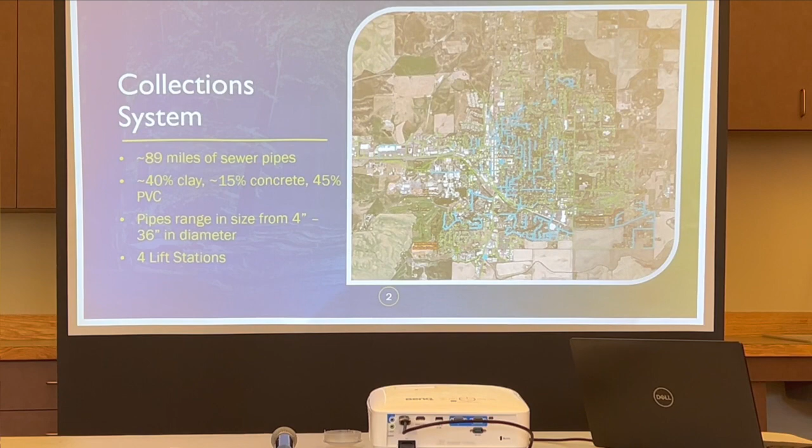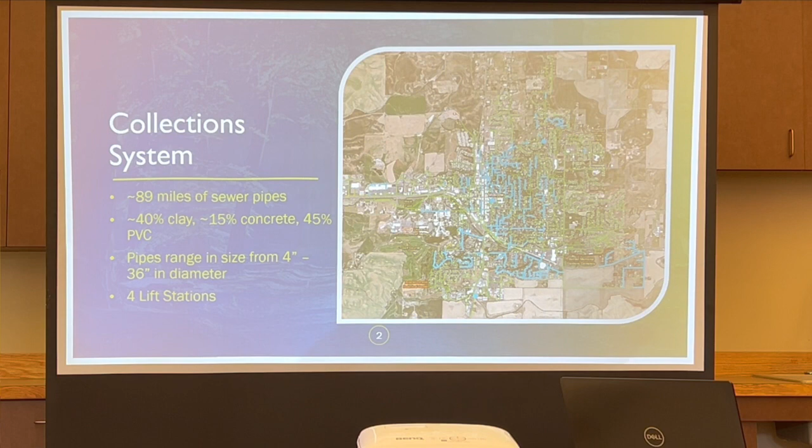Before it gets to the actual facility, we have a collection system that everybody's well aware of. We have sewer pipes under the ground, about 89 miles of sewer pipe that we own and maintain. If it's going to a property or a building, the sewer pipe that leaves the sewer main is owned by the property owner. We have roughly 40 miles or so of that. We have 89 miles of pipe. 40% of the system is clay, and that's relatively in the heart of the community.

Evan, could you use the microphone? Oh, yeah, absolutely. Please. Thank you. I didn't even test that, so testing. Yeah. Testing. That's great. Thank you.

So roughly 40% of the sewer system in the city is clay, and that is more so in the heart of the community. We actually have a physical contract from 1890 of some of the first installation of the clay system, which is really neat. As it expands outwards, you get some of the concrete sewer pipes, and since the 70s we've been installing PVC, polyvinyl chloride pipes, the plastic, which have roughly a 100-year lifespan. But the clay that we have has held up really well in portions of the system.

We have a variety of sizes, anywhere from 4-inch up to 36-inch, and those 36-inch pipes start creeping more in this direction as they approach our reclamation facility, which is right here. We also have 4 lift stations. Generally, when they think about a city and how to get sewage to dispose in a direction, they're thinking of the lowest point, so they follow the creek line and set it there as it leaves your city.

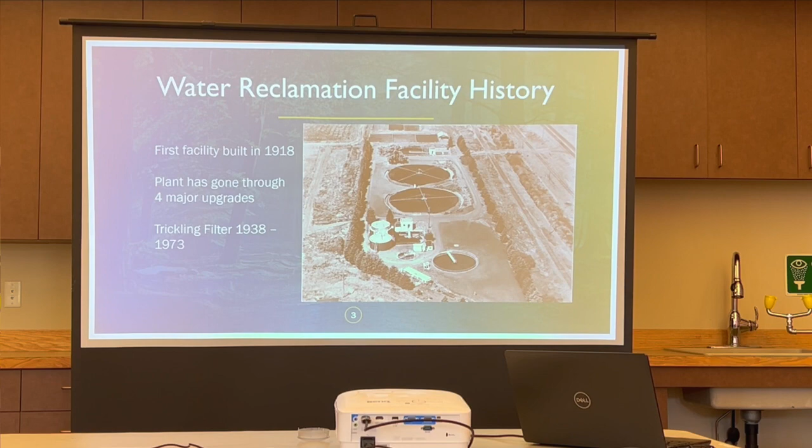So some history on the facility. The first facility was built in 1918. It didn't consist of much. It was some septic beds, septic tanks, and some drying beds. And we also have that original specification document from 1918, which is really neat. And those were kind of located in this region.

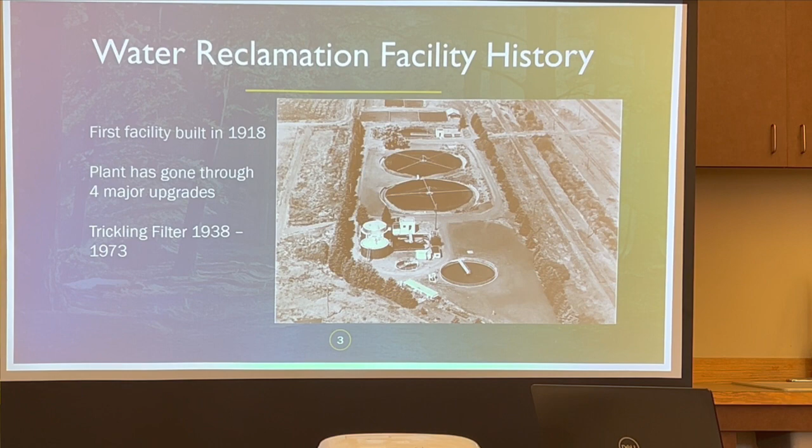In this photo, you can't see those septic beds, but the facility since then has gone through 4 major upgrades. 1938 was probably the most significant, the first real significant upgrade, which was these trickling filters. They're about 100 feet in diameter, and they consisted of a porous media, typically just stone, a rock, and it would allow that wastewater to go over these distributors and then filter out on top of this media and go through.

And the media grows what's called a zoogleal mass, which essentially helps remove the nutrients from the wastewater. They're not highly effective, but there are still trickling filters to this day throughout America. And actually, Coeur d'Alene has 2 of them, and that's what they use to remove their nutrients. But it's on a plastic media rather than a rock.

This photo was taken roughly in the late 50s. I don't know the exact year. We still have this tank. This is our primary clarifier, and this tank is out at our current reclamation facility. But from 38 to 73, there was a variety of upgrades: the digestion system, the contact chamber system, and the clarifier in 1956. It went through a lot of upgrades, but not until the late 70s did things start advancing pretty rapidly due to the Clean Water Act.

So once the Clean Water Act hit, the EPA had to start looking at what do we really need to prevent from hitting our waterways. The research on things takes quite a while to do. They look at river bodies, they look at small streams, they do what's called a TMDL, a total maximum daily load, on these bodies of water to see what would be impacted by a certain nutrient level or a potential contaminant.

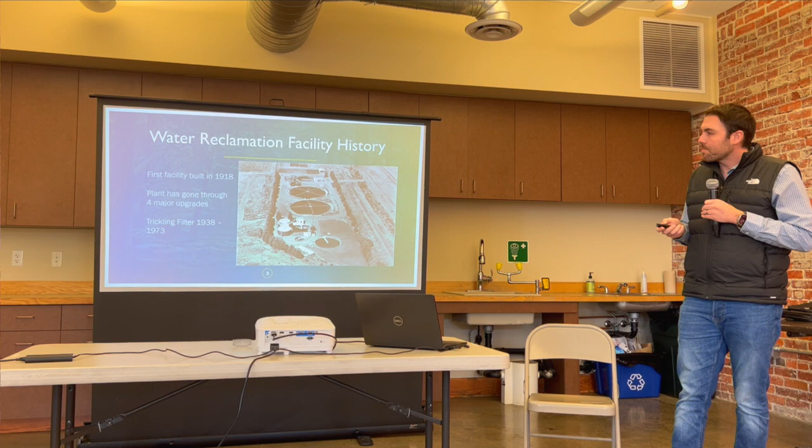As they keep researching things, there's exotic contaminants. It's almost never ending what they're able to find in the water. So the more they learn, the more advanced these treatment processes have to get. It's an ever evolving process for us to keep up with infrastructure upgrades. The next phase after 73, there was really nothing until 1996, where we upgraded a dewatering process and a chlorination system. We put in a building. I'll dive into the dewatering process a little later, but you're taking the built up sludge that, yeah.

Evan, I just have a quick question. Would you rather people ask questions while you're talking, or do you want to wait until the end? I'm fine making it a conversation if people want to ask during this. I leave time for questions, so I'm fine with that.

Okay, thank you, sir. So the dewatering process was introduced, and the chlorination system, that's a chlorine gas system that we'll jump into. And then in 1998, we put on a new headworks building, which these are old auger monsters. The headworks is the first initial defense of the treatment system.

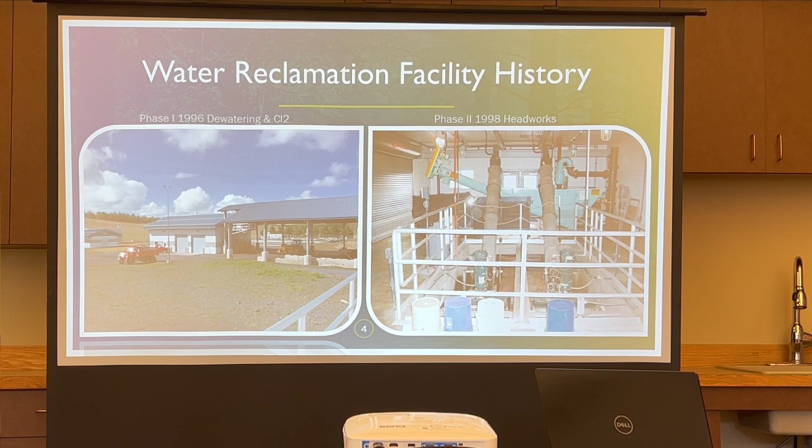During this time frame, in 1997, the EPA started going over what our permit would look like, and so they started doing their TMDL, studying the creek, what would be impacted if we didn't remove X contaminant in the water. And so in 1999, after we completed this, they issued us a permit, and that is still our permit today. It was issued in '99.

It expired in 2004, and it's been administratively extended since 2004. And so the EPA issued these permits. I don't want to bore you with all of these numbers, but there is a really important parameter that we do look at, which is total phosphorus.

It's one of those nutrients that causes, it's the most rapid producer of eutrophication, just excessive growth in a body of water. So aquatic life gets impacted because you have plants trying to grow, because it acts as a fertilizer in a body of water. And so you reduce the dissolved oxygen concentration in whatever that receiving body of water is, and then it impacts freshwater biota. So that's a really important one.

It is the trickiest nutrient for us to remove. It takes a lot of internal manipulation of our process to help and make sure that we achieve the parameter that they've given us, which is 0.136 milligrams per liter. That doesn't mean a whole lot to most people, but it's a really small amount of this contaminant that we're able to have leave the facility on a daily basis.

And so just to give you a general overview, this is east, and so we got north going this direction. The water flow path is coming through this headworks area, making its way down here, hitting these pumps, flowing through this process, and then going this direction, and ultimately out to Paradise Creek. So as we start walking through this briefly, that's kind of the flow path that we will be taking.

To give you guys some general treatment figures, we see on average somewhere around 700 million gallons of water come into the facility. So that's somewhere around 2 million gallons on an average day that we have go through. What we do experience from time to time, the collection system, all the sewer pipes out in the city, aren't necessarily sealed tight. And so the older stuff that we do have, especially when they laid it in the early 1900s, they allow it to weep.

We didn't have a mechanical means of cleaning the sewer pipe, and so they didn't really have gasketed joints on everything. These sewer pipes are just 3-foot joints going down a sewer line, and they allowed it to weep to be able to self-clean. We didn't really have a mechanism of getting in a 6-inch pipe and cleaning it really well. So when the ground gets super saturated, especially during the shoulder seasons, we will see increased spikes of flow come in.

That's not necessarily because we're attached to the stormwater system. We do have separate systems, but we will see an increase in the ground saturation, and then that will come into the facility. From a daily perspective, it's very rare to happen, but we do have events where we see surges in the water. That's incredibly common across the country.

Is that in the older parts of the city where the, what do you call them, the sewer things would come off and the water would be spraying out? Well, yeah, I know the downtown area, the stormwater system has trouble handling that, and so we do see a manhole just surging with water coming out of it. That's primarily the stormwater system.

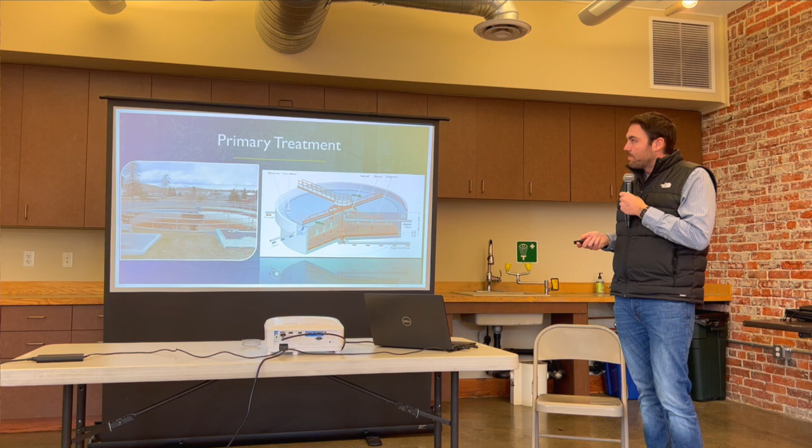The next step is influent pumping. These are 3 Archimedes screw pumps. They create our hydraulic grade of the facility, which is just the highest point. From there, we drop about 12.5 feet from this point down to the exit of the facility, so that everything can be gravity-fed from that point on and not pumped throughout different processes. Each one of these can pump 6 million gallons. We only had to do that once, during 2019. All 3 of them were pumping.

And this is the first place in which we measure the flow coming in. What happened in 2019? It was a flooding event in April. Yeah, I think it was April 6th or 7th. It was a massive flooding event. Maybe some houses got touched with the water.

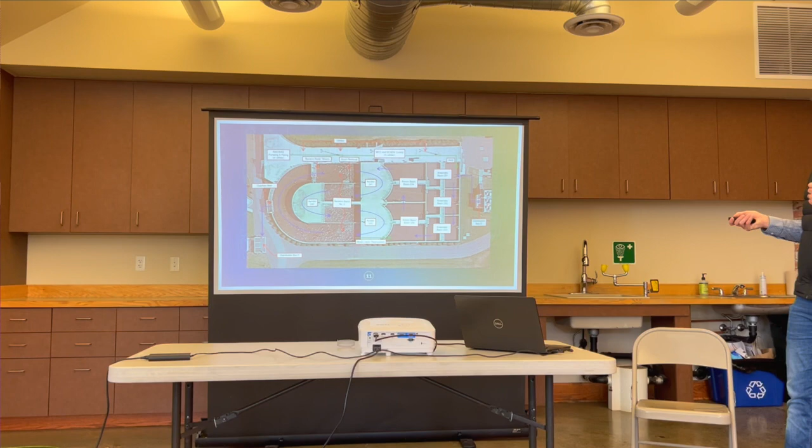So the next step, after our pumping station here at the hydraulic grade line, it comes into here, and this is quite complicated. If you go out in person, you're just looking at water, but there's a fascinating process happening, and I don't want to waterboard you to death with it. But I will go into the very basics of it.

One of the really neat parts about this is we actually complete the nitrogen cycle via these microorganisms, and so you have urea coming in the form of the ammonium ion. And it walks its way through, and this is an anaerobic basin, which means without oxygen. We have microorganisms that we starve of oxygen and food in a clarification process downstream, and we bring them back to the start to the incoming wastewater. At this point, that incoming wastewater has only gone through a screening process and nothing else, so it is a readily accessible fuel source for these microorganisms.

So what they do is they've been starved for about 6 to 8 hours, and they'll make their way into here and start feeding on the incoming waste, and they use it as a fuel source. So they have already picked up nutrients throughout the process. We're reusing them. So they keep the phosphorus molecule on them as a fuel source for storage. They will eventually abandon it if they get too stressed. And so that phosphorus molecule is detectable by doing laboratory analysis when we run tests on it.

But what they'll do is they'll come into it with it on them. And right now we'll have really 5 milligrams of phosphorus in here. As they keep consuming waste, they'll say, I don't need this fuel reserve anymore, so I'm going to abandon it, and they will start releasing it into this one. And like I said, we want to get rid of phosphorus, but what they're doing is they're abandoning it and putting it back into the water. So it starts spiking our phosphorus concentration as it moves through these processes. These are all 3 the same type of tank. It allows detention time and allows them time to consume fuel, and then they ultimately release the phosphorus.

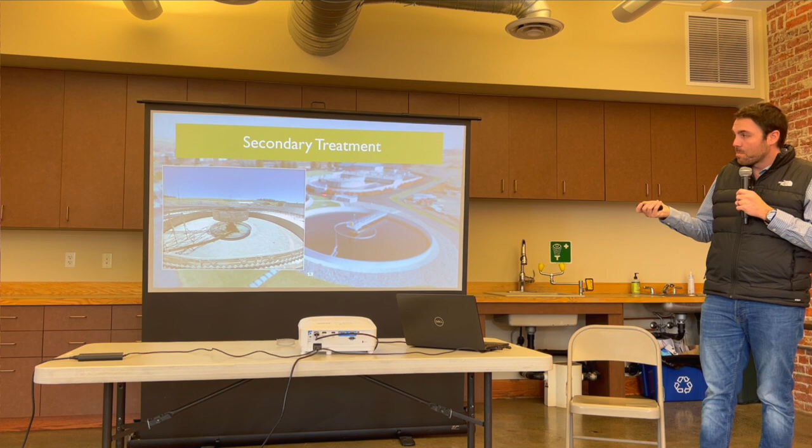From that basin, we have that brown liquid, those microorganisms. We have them leave and come to this clarification process. Again, it's just a quiet area, just like our primary clarifier, yet these are about 1 million gallons in capacity. They're 100 feet in diameter. They allow the microorganisms to settle out.

If those mixers on this basin were to turn off, they would settle out rapidly, instantaneously. They start settling and compacting down at the bottom. They do that in these clarifiers. So they settle out to the bottom, they end up getting pumped down here and returned. So these are the ones that were starving. They get returned back to the start of the process to help us consume the waste.

And then throughout the day, a portion of them start to get removed to holding tanks to then become the solids. So we turn them into solids at that point. So they will stay in here for hours. It depends on flow. It's really based off of hydraulics. They'll stay in here, they have no oxygen, very low oxygen, and no new food source. So they're very eager to start the process over again. And then a component of them get removed and wasted out, and that is how we maintain our population, our poundage of population in the system, through these tanks.

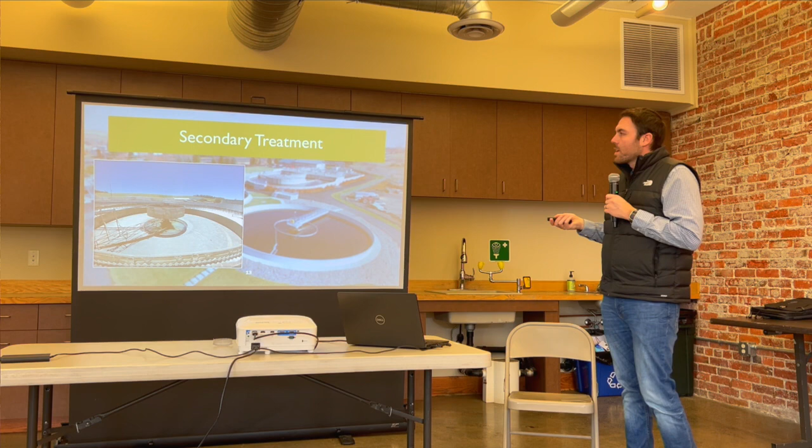Following that, in 2010, when we completed another upgrade, it was about a $10 million upgrade, we did a tertiary filtration system. This is a continuous upflow system. I didn't take a picture of it just because it literally looks like we're looking at nothing. But the CAD drawing of it breaks it down a lot better. It introduces the water from the very bottom level of these media filters. It's just a very coarse sand, and we introduce aluminum sulfate, and it binds to the colloidal solid, the phosphorus molecule in the water, and then it starts getting attached to the sand.

The sand gets continuously backwashed, and then we remove that dirty water and pump it back to the start of the system to introduce the dirty water back to the start of the wastewater treatment process. And so these do the bulk of the additional refinement of phosphorus removal for us. That was their entire intent, to keep phosphorus low and what's called nephelometric turbidity units, which is just the clarity of the water. It removes large solids, any particulate in water.

So legally, they only need to run from May 15th to October 15th, depending on how the week falls. So they're only running for half the year, and that's when the growing season is. So that's when we need to legally remove the phosphorus and keep these online. So they are not yet online for this year, but we'll get them up and running soon.

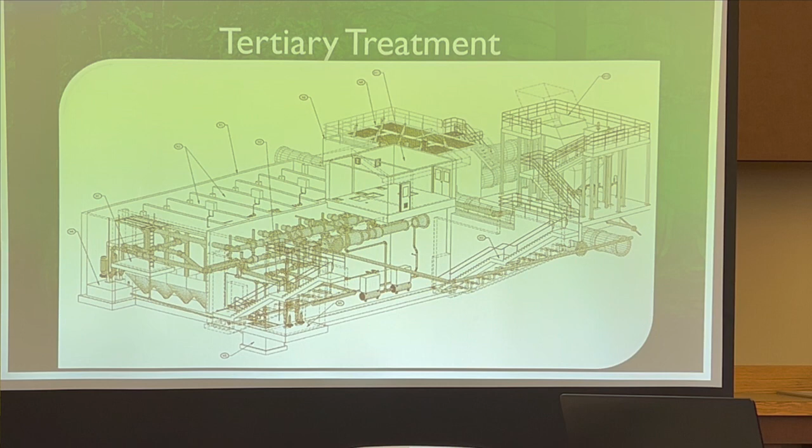Following that, they go through a disinfection process to kill any of the pathogens in the wastewater. So we currently use chlorine gas. It's not the safest, but it is highly effective. The plan is to wean off of that and go to ultraviolet disinfection, which is substantially safer, because with chlorine gas, we have processes in place to utilize it safely, but anything can happen when you are working with these. You're working with them on a vacuum system. It's the safest possible way to do it. And we also have a containment for scrubbing the chlorine if there was a leak in those confined areas.

How long before you start the ultraviolet? That's a great question, yeah. We have that built into our capital budget. We anticipate starting design on it in our next fiscal year for 2025, and then working through design and likely anticipate construction of it in 2026.

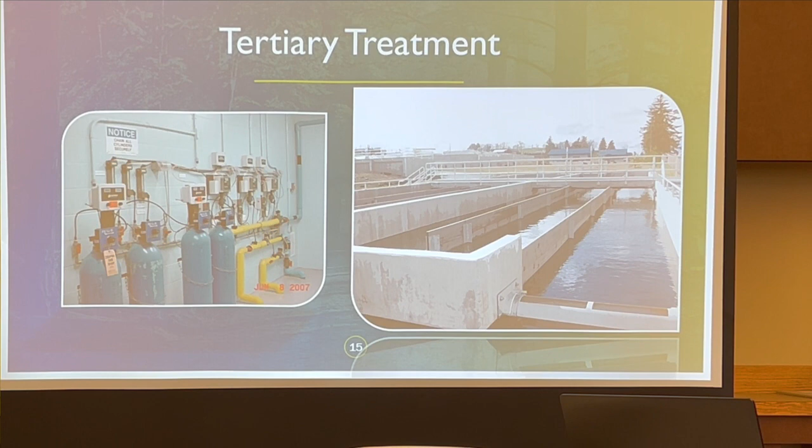Following that, this is the solids component. So we have the liquid leaving through that chlorination process, and then we have the solids that we wasted and held in a tank. At that point, they're about 1% solids, 99% water. So if you take a drop of it, that's kind of the composition of it. We introduce it into what's called a belt filter press. It's a series of increasingly smaller diameter rollers. We bring in polymer to bind the microorganisms together, to coagulate them, and then we introduce them across this platform.

And so as it goes through, it dewaters itself and catches water and drains it off, and then goes through that series of increasingly tighter rollers and just compresses it and literally makes what we call a cake. And that is what it looks like. It's just a cake coming perfectly off this. That is just microorganisms, essentially. So they have kept some of the residual nitrogen, and they've kept the phosphorus, and so they have those fertilizer-like values.

And historically, this was just being applied to the land in the liquid format. They just put it in a truck and pump it out onto some farmer's property. And actually, still to this day, a ton of cities dispose of it via just discharging it onto land. You obviously have to get permitting for that, but that is still an acceptable practice. Probably won't be for very long, but that is still present day what happens in some places.

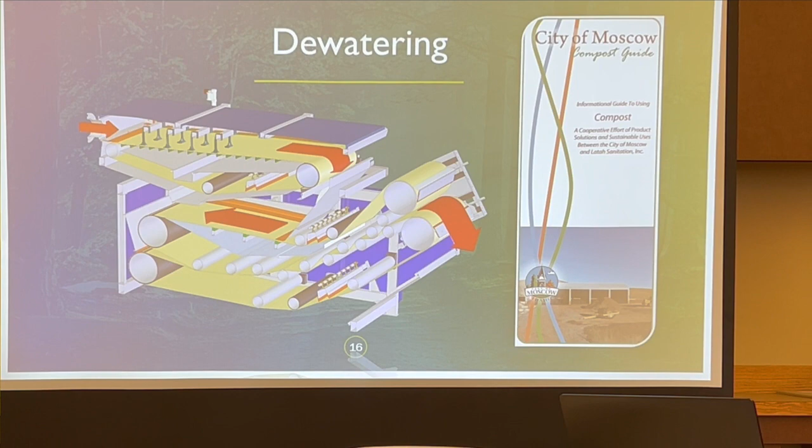You called it Class A? What does that mean? Class A is just a threshold of treatment. It has to have a reduction in its metals concentration. So we analyze 14 different heavy metals, and then it also has to have a lower classification for salmonella growth. And so it's to just deem it so that it's not going to get people sick.

And then it has to have a low vector attraction rate so that animals or different agents can't track it. So it's got this vector attraction reduction. So that just means it has to get heated up to a level above, I think it's about 148 degrees, for like a 10-day period. So you have to create a really good compost product. And they mix that with an amendment, and so they trommel it together, and then you get a pretty good compost.

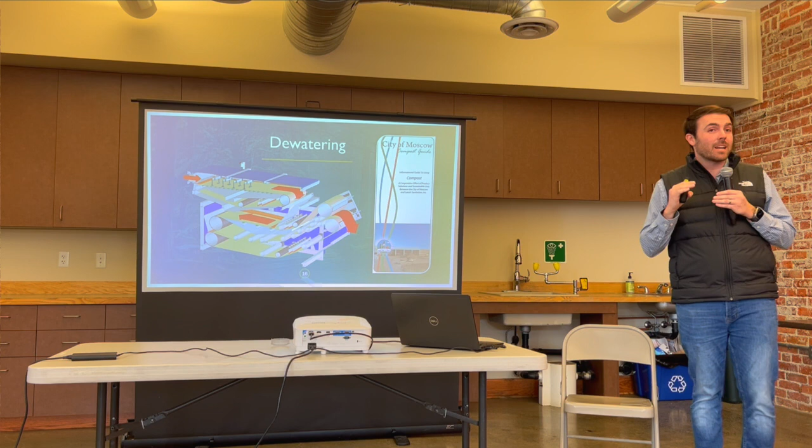The disclaimer on that, it does have the potential to have clopyralid in it, which is a broadleaf herbicide. And so we don't necessarily control that. That is in the amendment that gets mixed with the biosolids. And so there is always the potential of that. So we don't recommend putting it on crops that you're going to eat or that you really hope would live 100%. So it's got a very low amount of it. We do track that number. There is no legal requirement of us having to track that number, but we do track that number in the biosolids.

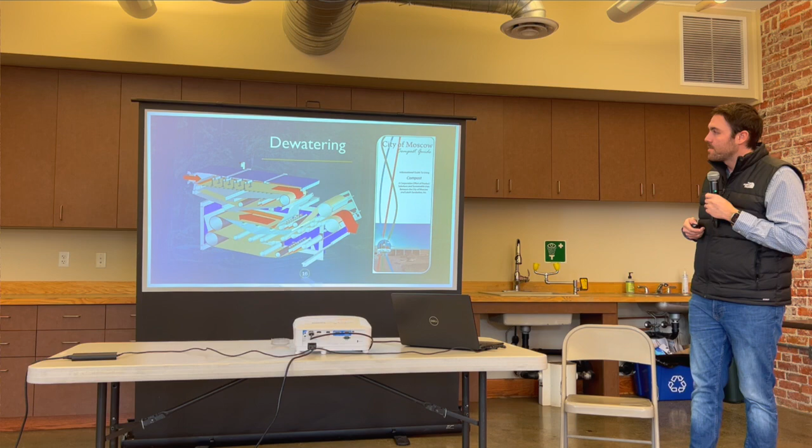Just to touch on some of the upcoming capital projects that we have, we do have about $45 million of potential projects on the 10 to 15-year horizon. Our capital budget currently is sitting very nicely. We have roughly $17 million in funding right now, but of course we have projects lined up to utilize that.

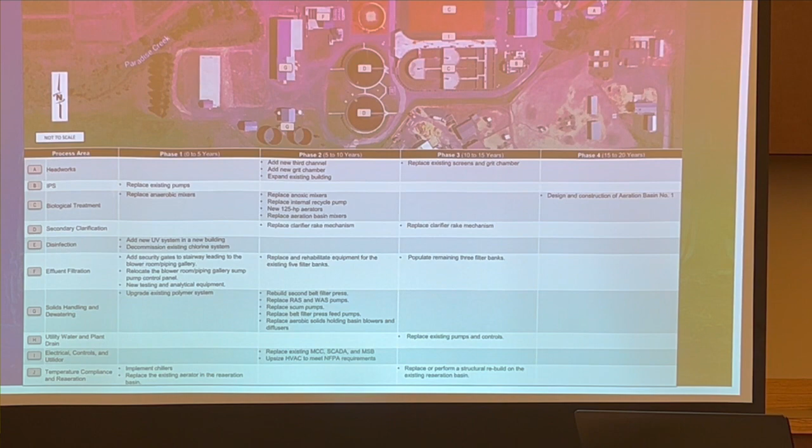The one that's on our heels right now is the IPS pumps, these large Archimedes screw pumps. Plan on replacing those. We're working with a consultant right now to get those replaced and installed next summer. And we are then going to have to do some treatment upgrades on this basin to increase our capacity for the mixers, just larger horsepower motors to be able to accommodate the 1.7% increase that we will potentially see each year.

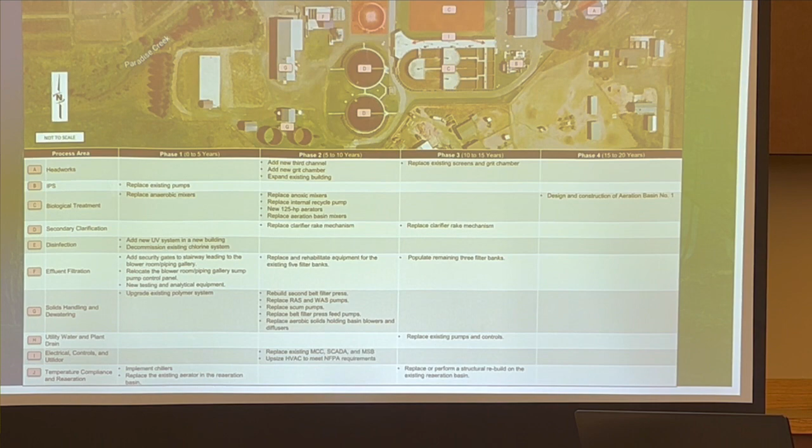And then we'll do the UV ultraviolet disinfection project and continue to really just maintain the facility with effluent filtration upgrades and potentially a temperature compliant alternative that we have coming up. One thing to note, we did receive the Idaho Conservation League Gold Star, which just means we had no

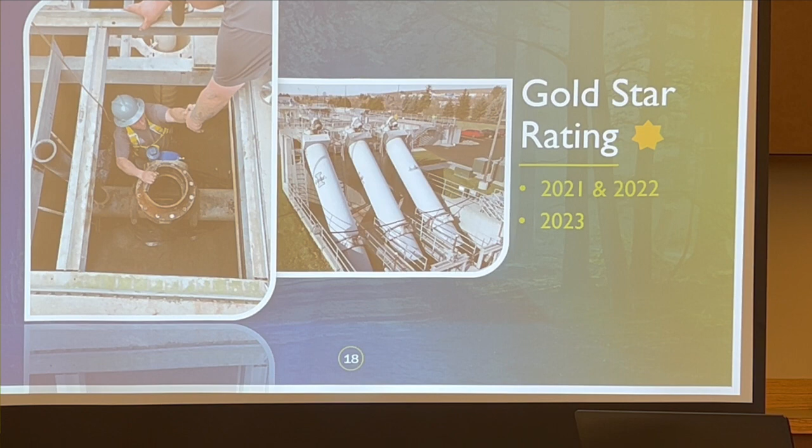violations for a few years in a row, which is really great. It's definitely hard. It takes a lot of work to make sure we're doing everything appropriately. These facilities are very touchy, and we also had no violations in 2023. So just definitely a testament to the operations team that runs that facility. We are in good hands out there. So it's really, really good to know.

So getting into, did anybody have any questions on that? I'm just going to briefly touch for about 10 minutes on the reuse system. All right. Yeah. On those Archimedes pumps, increasing the pump size, you always look for energy efficiency and the most effective use of these, right?

Yeah, absolutely. What we've been assured of is those are probably the most efficient way to move water. They're actually a relatively small motor for the size and the capacity at which they can pump, which is really neat. And so we are actually replacing them in kind. So we're going to go with the same slightly larger 6.4 million gallon capacity on each of those, and they are unbelievably efficient at moving water, which is really nice.

The other alternative is utilizing submersible type pumps. But generally it requires a large variance of motor horsepower to be able to control that potential variance in flow. So these instead run at a consistent rate in RPM regardless, which is really neat. And you anticipated the UV treatment coming up. Is there anything in the capital budget for ozone or anything like that?

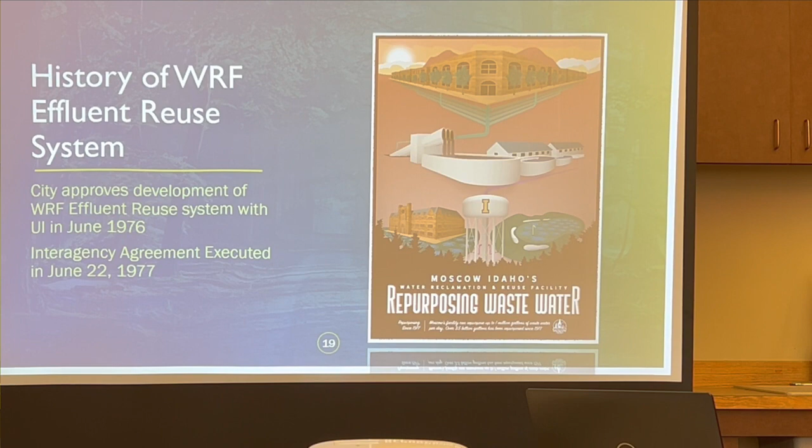No, so we did a disinfection study. You may have been mayor during that, I'm not sure. But we did a disinfection study looking at the different disinfection alternatives that are available. And we settled upon UV. One, it is becoming increasingly more popular in the industry. So the accessibility to actually having those components and the effectiveness of it is remarkable on those UV systems.

And so the redundancy features, the safety features of it is really what guided us towards wanting to look at an ultraviolet system. We'll get into that, study it a little bit more, but I'm pretty confident we'll go with an ultraviolet system. But yeah, I did look at quite a few alternatives and ended up landing upon UV.

And the last question I've been saving up for you is whether the aluminum sulfate residue causes some effects on the sludge, so that you get crusting and impermeability with the compost and stuff. Is there enough residue in there for any problems? Not necessarily on the solids component. We don't have much of an issue there.

Where we do have an issue is on any metal that it contacts. It's incredibly corrosive. So when we do have large dosages that don't get removed in backwash, the filter does a remarkable job at backwashing to hopefully get that residual value down. But where we do notice it is in any contact of metal, not necessarily in the solids component. Great question.

So, history of the reuse system. The city approved development of the effluent reuse system with the U of I in 1976, and there was an interagency agreement executed in 1977. Since then, we've reused roughly 3.5 billion. I say roughly just because I don't really trust flow meters back then. It's hard to say the accuracy. Even today's most accurate flow meters can have a 6% variance, so that gets pretty large pretty fast.

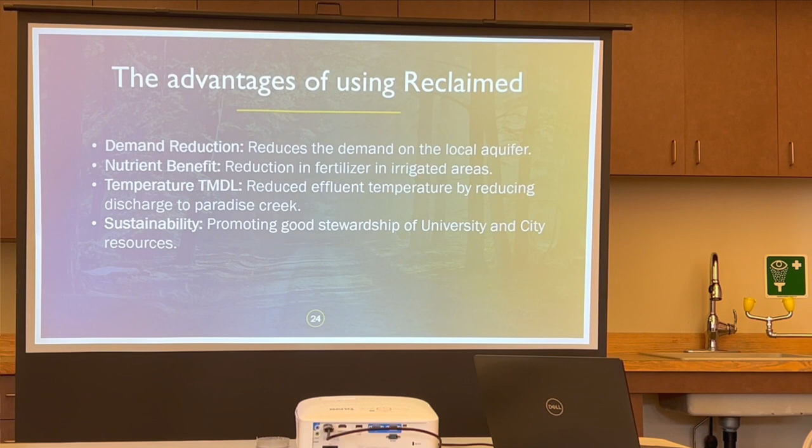The advantages of it are the demand reduction. Obviously, it reduces the local demand on our aquifer. And the nutrient benefit that I had mentioned for the fertilizer, and with us, it's the temperature TMDL. It reduces our effluent temperature by essentially what the load is that we're distributing each day. It's a variety of the creek's flow rate, our flow rate, the temperature of the creek, and the temperature of our effluent. And there is a sliding scale on how we come in compliance with that.

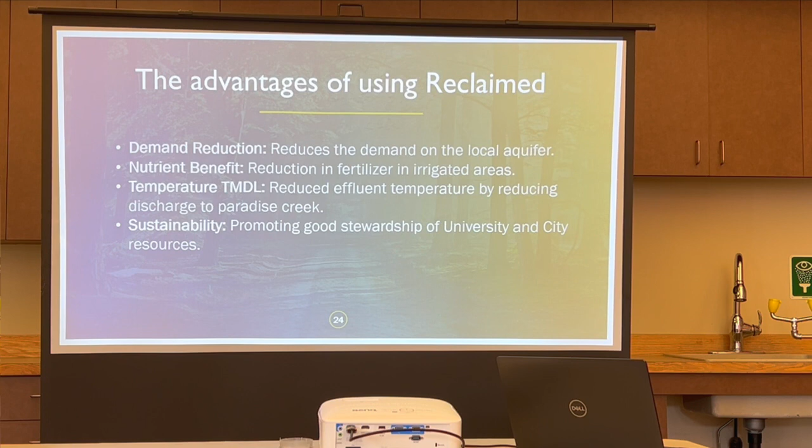But the more water they take, it helps our discharge effluent. And then sustainability, good stewardship between the university and the city's resources. Of course, there are disadvantages. The regulation component of it, there's tighter regulations on reused water versus just potable water. If they were just to use aquifer water, they could do it at any time. They wouldn't have to worry about putting that on the ground.

Application depends upon the class of the system and having buffer zones. The additional costs, you have another infrastructure component built in. So you have a new distribution system to run water through, and replacing pipe currently is unbelievably expensive. So if they did have to replace some of that, I'm sure they will eventually, but it will be expensive.

And then licensing, training for personnel. You need a new license in the state to operate that system, so somebody has to have a reuse license to be able to do so. And this is run by the University of Idaho, well, technically McKinstry. They have operators that operate this system. We just send them the water to do so.

Over the years, there have been discussions of having satellite treatment facilities. And I'm thinking about the lift stations going in and new development happening. If the University of Idaho effectively has or questionably has water rights to the total amount of effluent, or maybe not, we don't know, then could there be reclamation that takes place before it gets to the main wastewater treatment or water reclamation facility?

You're absolutely right about that. That was studied under our 2012 adopted comp plan for the sewer system, the potential of satellite treatment facilities. They do make these package-like plants. They're membrane plants, where everybody's heard of reverse osmosis, very similar to that. Very small footprint. They are costly. They're somewhere around the $10 to $12 million mark present day.